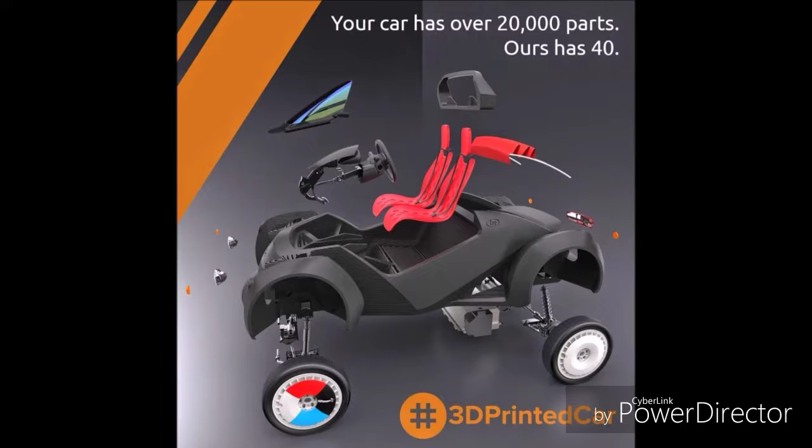To help us with the body of the car, we decided that it's a good idea to reassemble the Apex car. Taking into reference what Local Motors did with the Strati car, we decided to design the body and the chassis all together. Combining these two parts saved us the need from including some of the covers that the Apex car originally had.

In order to have the correct dimensions, we had to assemble the components of the Apex car to start working on the design in Creo Parametric.

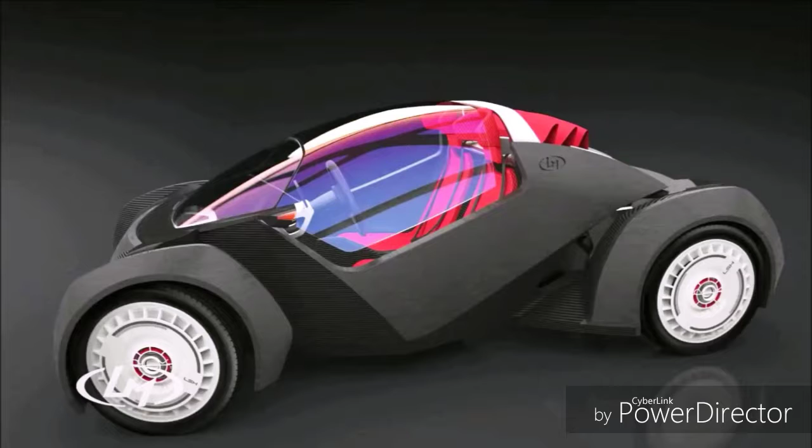For the design of our Apex car body, we were able to modify the original design into a more aerodynamic yet resistant version of it. This was a really extensive process as we faced some restrictions. First of all, we had to come up with a way of designing the chassis and body of the car as one piece. This was done using the Strati's design as a reference.

In addition to that restriction, we had to keep in mind that the design had to be 3D printed. These added some major parameters that needed to be met. We approached this design to be kind of an eggshell, with the body on top, the chassis on the bottom, and leaving space in the middle for the wheels and other components.

Combining both the body and the chassis makes it easier to design, to print, and to include in the Apex car, since unnecessary pieces are eliminated.

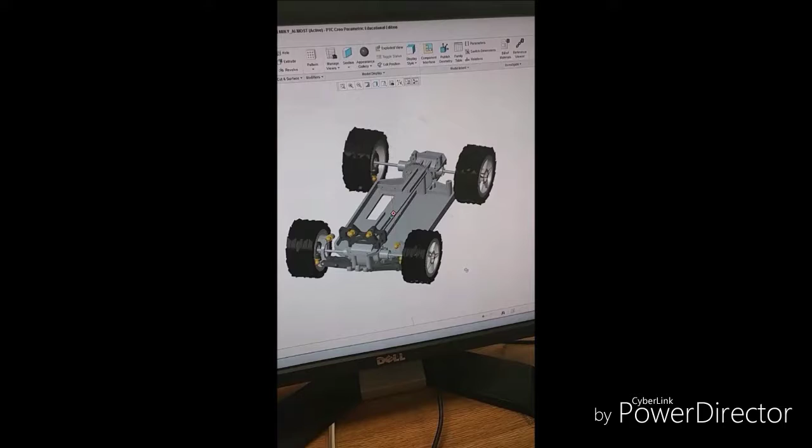For the completion of this design, we needed to have the assembly of the chassis with the wheels separately from the body of the car. Then we assembled them together, leaving enough space for the electric components.

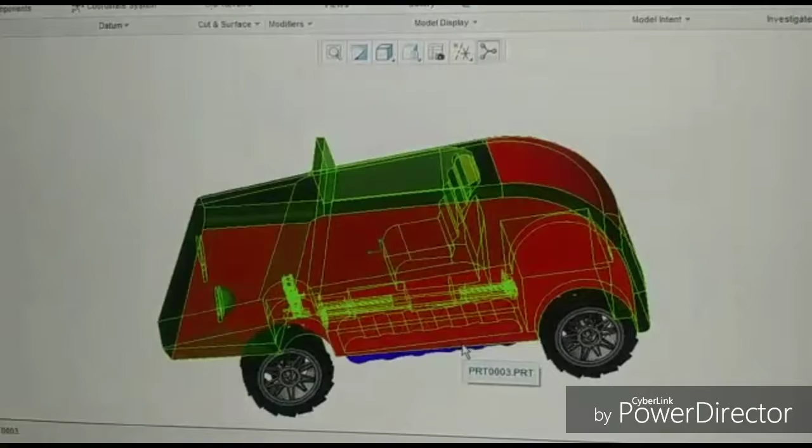This is our model. The shape allows it to be easily printed. This design doesn't require much material. Also, components are being removed from the bottom to remove material.

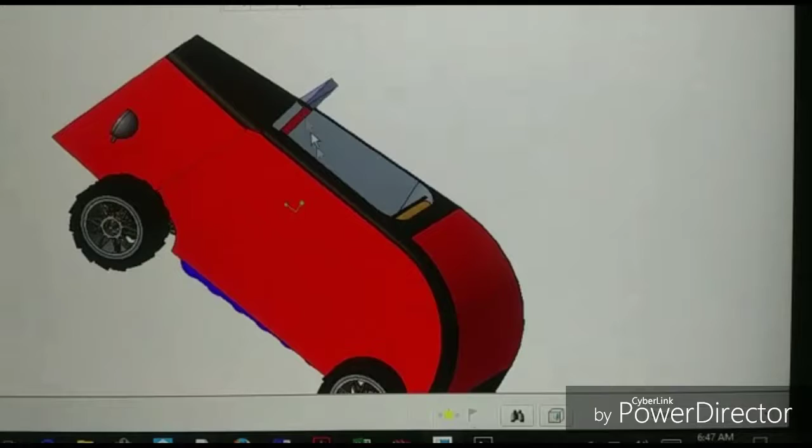And on the top, we have the cavity where a seat is located. Also, a lot of material is being removed from there. Even if it looks simpler, it is not. It resembles a hot rod.